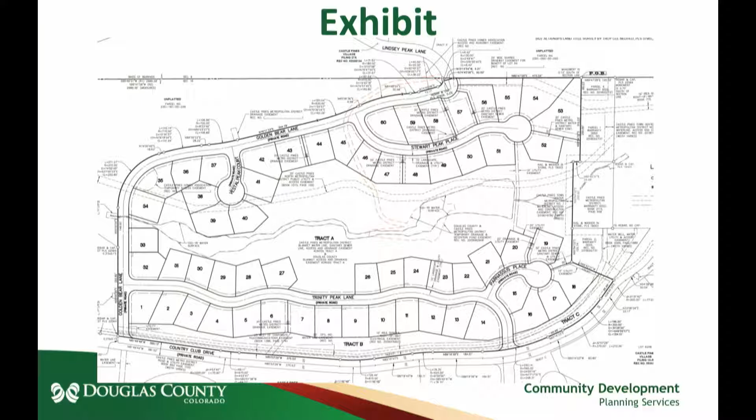All easements proposed by separate document will be recorded prior to recordation of the final plat.

Public Works Engineering has approved all required studies, reports, and construction plans for the final plat. Staff has evaluated the final plat in accordance with Article 5 of the subdivision resolution. Should the board find that the approval standards for the final plat are met, the following proposed conditions should be considered for inclusion in the motion.

Condition number 1 has a slight change to what's included in the staff report. Condition number 1 is proposed as concurrent with, rather than prior to, recordation of the final plat: the Douglas County Temporary Drainage and Detention Pond Easement at reception number 2009-062-906 shall be vacated. This is to protect the county, so the easement would be vacated just at the same time as the plat. It's out of principle that protection would be there, and that easement wouldn't be vacated until the plat is being recorded, so that if there was some consideration that happened, that easement would be there. That's the reason for that change.

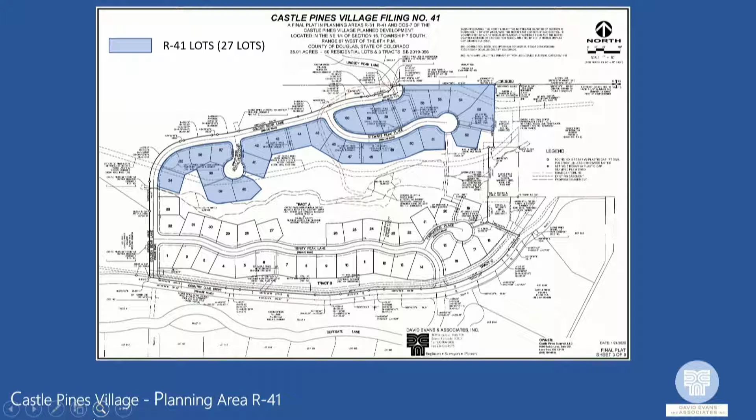R31 is located on the south side of the open space, and 33 lots are proposed within planning area R31. The open space, as Matt mentioned, is Tract A, Tract B, and Tract C, totaling 13.16 acres of the 35-acre total. And the whole project together looks something like that.

Some of the modifications that have occurred since the time of preliminary plat approval: there was a center roadway approved with the preliminary plan, located in the middle of Trinity Peak Lane, causing 3 access points on Country Club Drive to the south. That road was restudied and envisioned to be unnecessary, and it was also adding additional headlight impacts on the community to the south.

So as a result of traffic studies not showing it being needed, as well as reduced headlight glare, that was decided to be removed, and that was done by the applicant as a result of public feedback.

The 2 detention ponds that were located in Tract A were converted to a single pond. What that allowed us to do was reduce impacts on the open space area, the area otherwise encumbered by the 100-year water surface in the pond has been reduced, allowing more trees to remain.

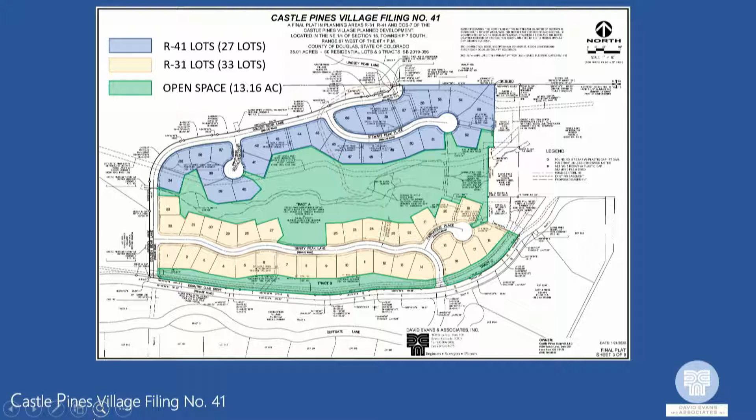So an updated traffic study was done to evaluate that traffic. The conclusions were that there's an estimated 478 weekday trips that will be generated as a result of the new development, 172 of which would go north via the Chase Lane to Lagae Road access. What that converts to in AM/PM peak is roughly 12 trips in the morning using Lindsey Peak to Oxford Peak to Chase, and roughly 16 vehicles in the PM.

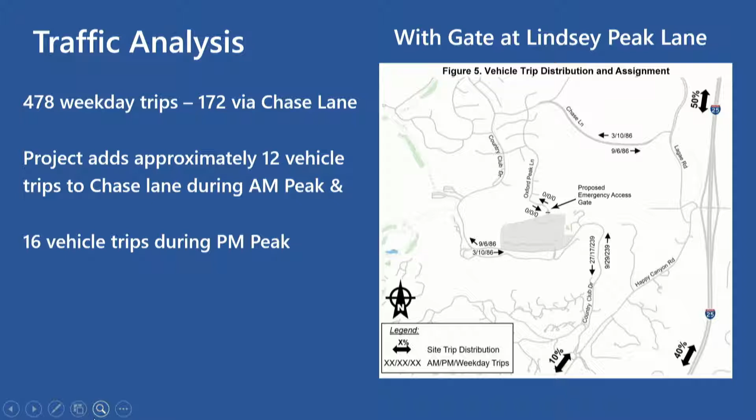So those aren't very large numbers, but because of the community concern and in trying to be good neighbors, the applicant has agreed to install an emergency vehicle access gate, depicted crudely here and shown in more detail here. Lindsey Peak was originally constructed in 2002 as a dead-end road that would be continued later. With this plan, Lindsey Peak will essentially end in a roundabout, or cul-de-sac bulb, and will be barricaded from traveling southbound to Golden Bear Lane with an emergency vehicle access gate.

Concerns related to the location of the gate that were brought up are really nothing major. As you can see, it doesn't have the ability to move too far. We just wanted flexibility to work with South Metro on whether they have any concerns related to the gate size. The idea is, in working with the Castle Pines Homes Association, they have gates used in other emergency vehicle situations, and we'd like to reuse those gates. South Metro Fire has said that would be acceptable, but they'd like to see a more architectural design before doing so. So the change we're talking about is just a few feet in either direction to accommodate gate clearances.

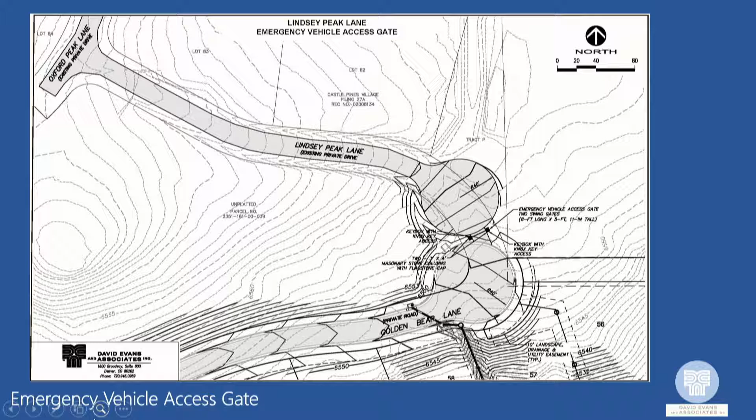Thank you, Mr. Bester. Questions?

I don't have any questions, but perhaps just a comment for the applicant. First and foremost, it's always a pleasure to see you here, Mr. Buster. You always do a great job, very professional and well prepared. And the questions that I had have been addressed, so thank you for that.

I have one question, but it's for the county attorney, Mr. Ingalls. I'd just like to put this on the record. We've had other applications come to us where neighbors in existing neighborhoods have been opposed to a road connecting into their neighborhood and have asked for a gate. As I recall those situations, there is a state law that prohibits a gate being used. So I'd just like it on the record why, in this particular case, a gate is being used when other times we were told it could not be done.

Thank you, Madam Commissioner. There is a law that prohibits counties from closing county roads to the public for other than maintenance and for a limited period of time. That law has been cited from time to time so that we don't close county roads via a gate and prohibit the public from using them. I believe these particular roads are not going to be county roads. But also, from time to time, we will allow a gate on a county road so long as on both sides of the gate the road remains open to the public. While rare, we have done that in a couple different situations. But the law would prohibit us from closing county roads to public access.